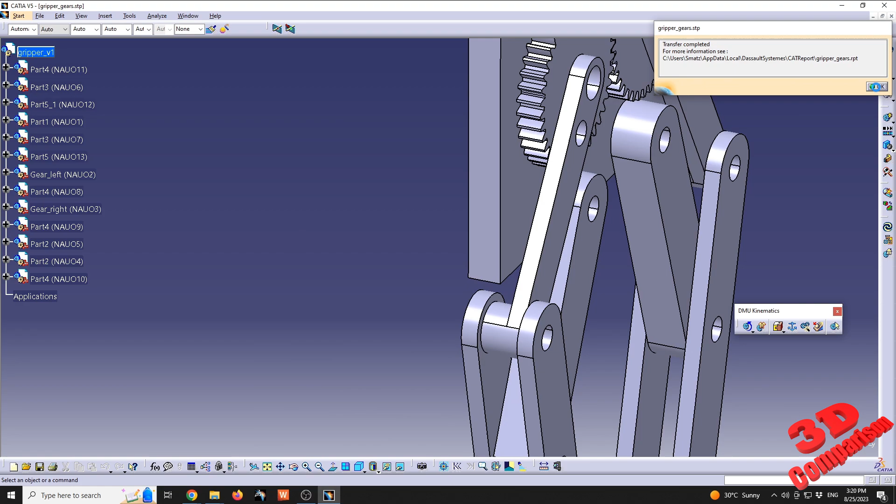I already have that file downloaded, so I will drag it and drop it over here. As we can see, the file loads like this. It's not aligned to the general axis of CATIA, meaning if I go to the cube and select the top view, the orientation will look like this.

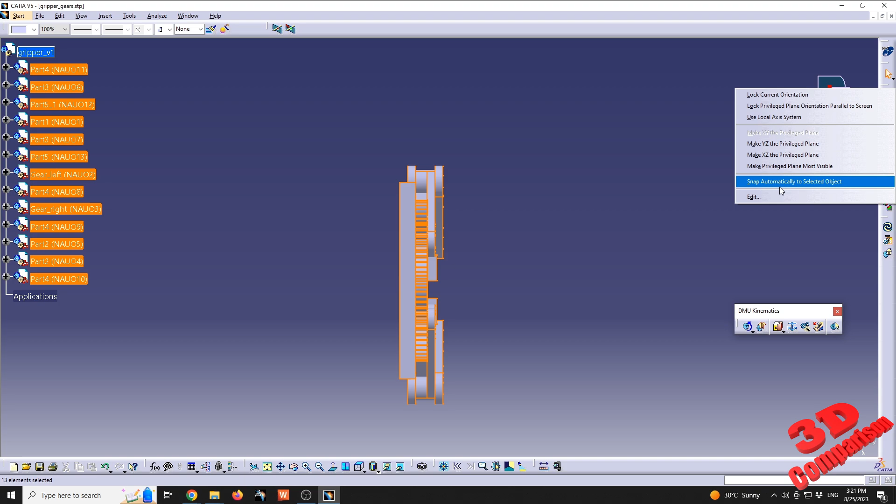In order to calibrate this and have it rotated, we can select everything, go to the red dot on the compass, right click, and go to snap automatically to selected object. Now if we make a selection, the compass will snap automatically.

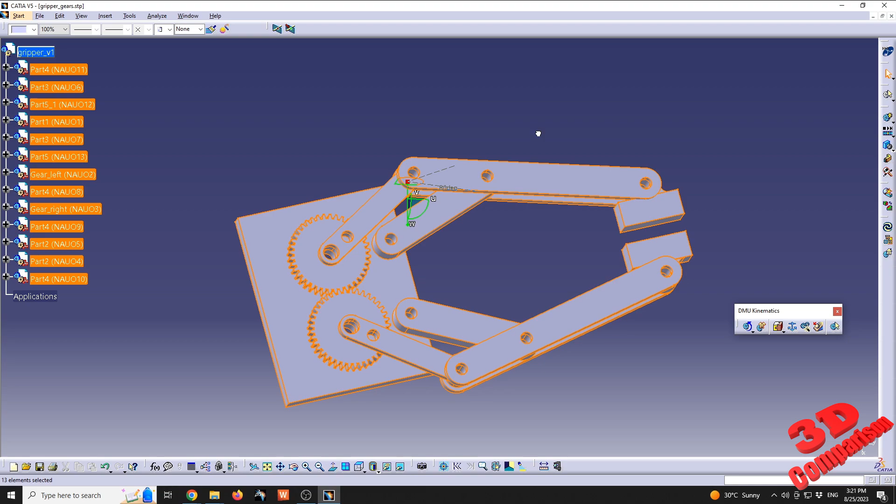We see that the rotation axis will be this one, so I'm going to grab that and rotate it all the way to 90 degrees. Afterwards, I will also rotate it on the U and W axis to have it positioned like this.

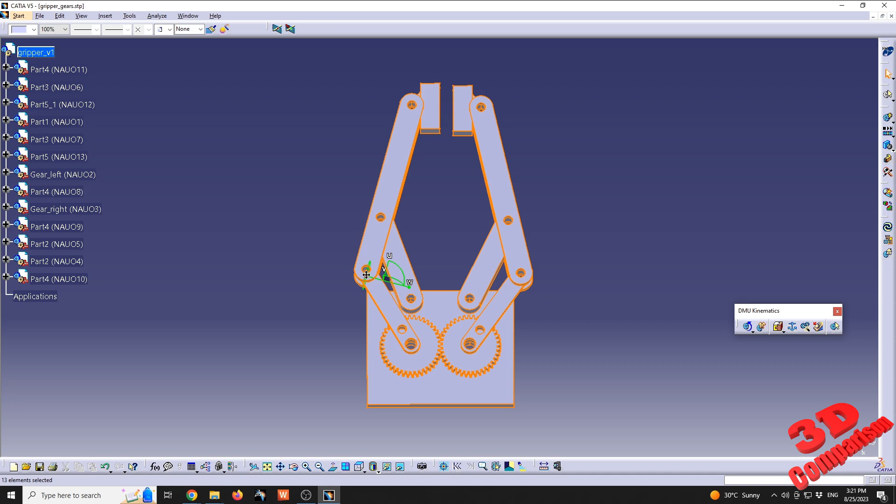As we can see, there are still some elements that are not aligned, so we can enter exact values. I'll right click on the red dot, go to edit, and we have the absolute coordinates here. I will set the angle for X to be 90, 0 for Y, and 180 for Z, and this will be the rotation.

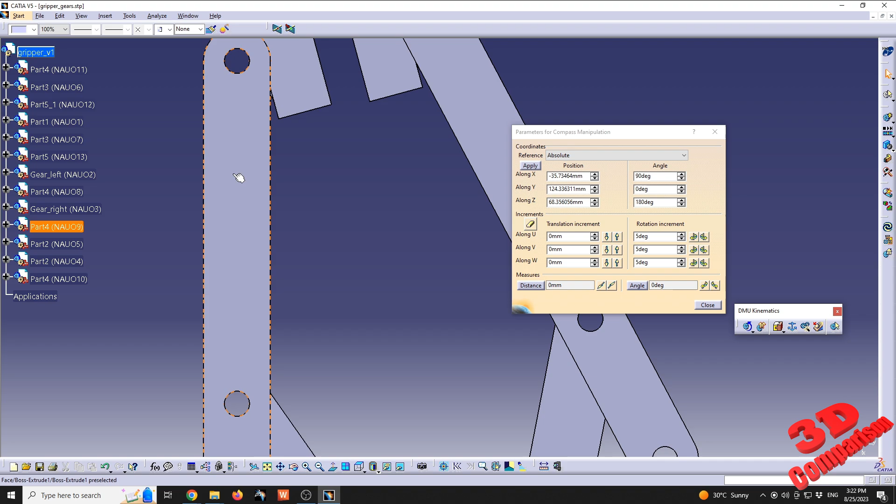Now I can no longer see the depth of the gripper, so this is properly aligned to the camera. But at the same time, the gripper is slightly misaligned.

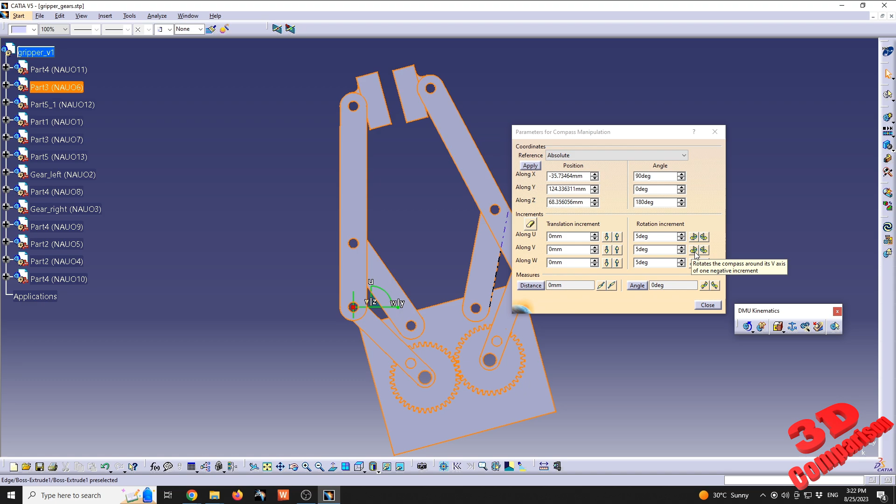We can now use the rotation increments, on the bottom right side of the screen. If I click on this, we'll see that this rotates the compass around its V-axis with this value, in this case 5 degrees.

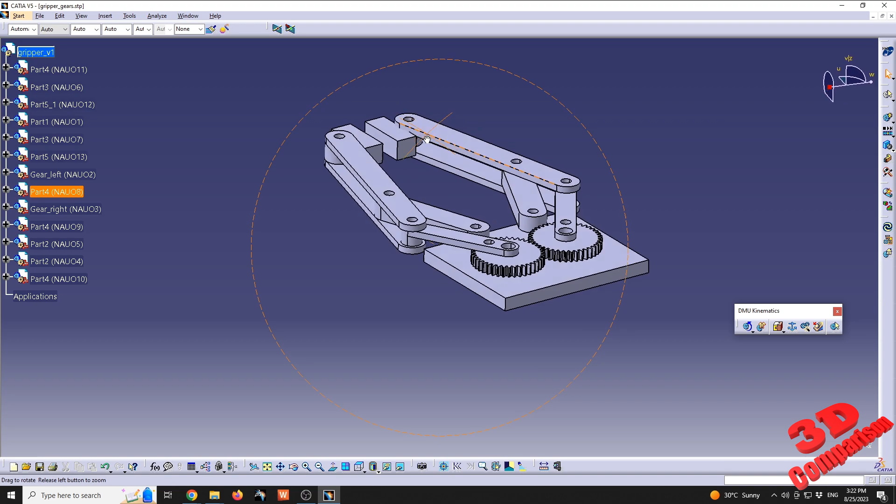So I will slightly rotate this until the gripper is positioned like this. Now, for this gripper, I intentionally made the components not aligned in order to have a good practice example of how we can fix that.

I'm going to jump to Assembly Design because we can align the elements over there. Within DMU Kinematics we are going to simulate them. So go to Start, Mechanical Design, Assembly Design.

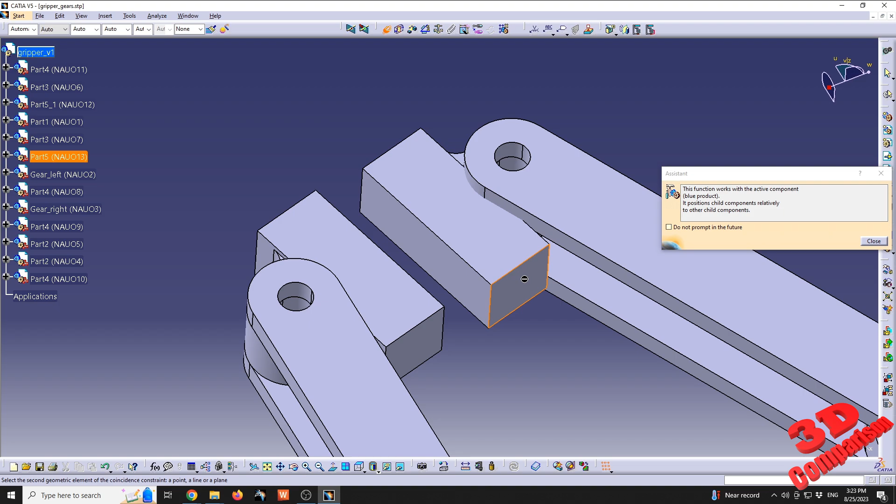I will make these two gripper ends be at the same level, using the coincidence constraint. Afterwards, I'm going to select the bottom surface, so we have this plane aligned with this one.

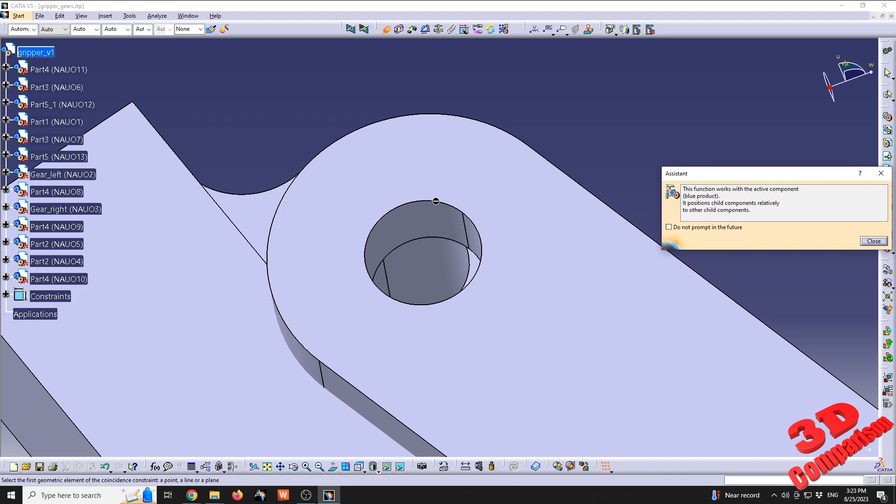We're going to see how this part moves into position to have the same orientation. Click OK, and we see those are now aligned, but the problem is everything else is no longer aligned. So again, using the same constraint, we add a constraint between this section and the other one, starting from the middle and then this one, in order to have that moved.

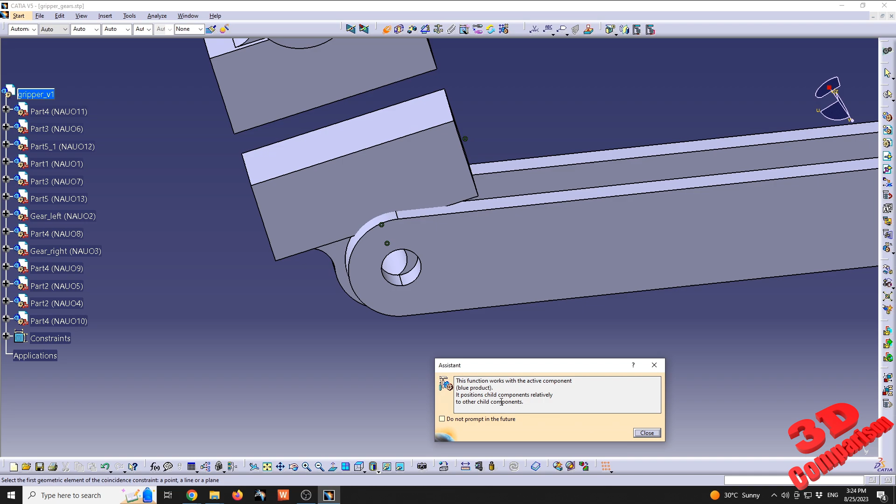Repeat the same command. For me, I'll press Ctrl+Y since this redoes the last function. CATIA Assistant says this function works with the active component; we see the blue product here. I'll add this not to prompt in the future, and we can just start aligning our components.

Again, press Ctrl+Y. This redoes the last command in CATIA, and we just have those positioned.

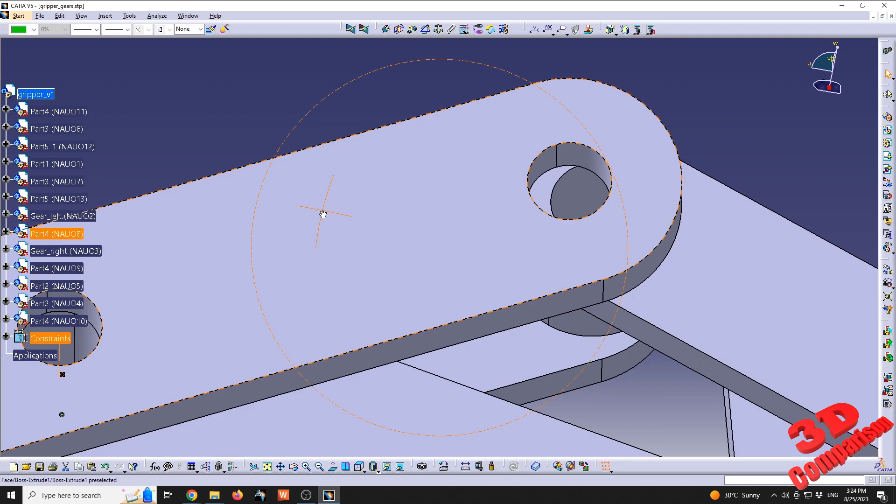Okay, over here the same coincidence. We see that that is considered to be redundant, so we just need to add this one. We see that moved the plate.

So I'll go from the plate to this one. If I go the opposite way, it will still be the same. I will just fix the plate in this case.

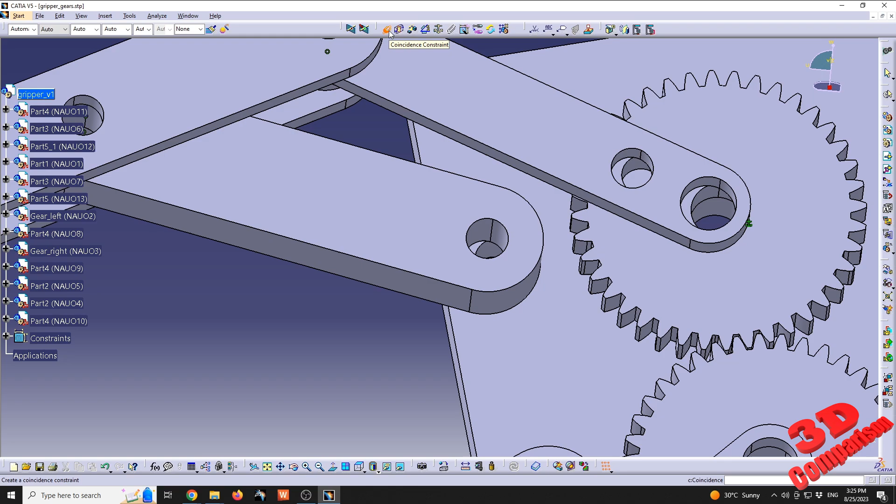So go for the anchor, fix component, and afterwards redo the coincidence. This will move these elements closer to the base. Afterwards we see that these are already centered, so no additional alignment is required.

Now that we have the gripper better aligned, we are going to go and define the mechanism.

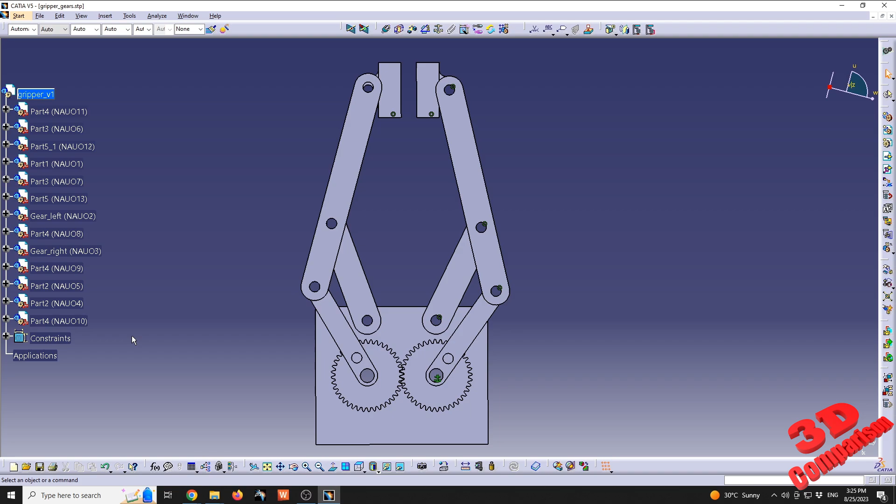We could use the automatic generation that transforms constraints into joints, but in this case CATIA won't be able to do that, and let's see exactly how that works and why it won't be able to.

I will go to Start, Digital Mockup, DMU Kinematics, and we have the possibility to use the assembly constraint conversion, which opens this section, and we need to define a mechanism, so that's the first step.

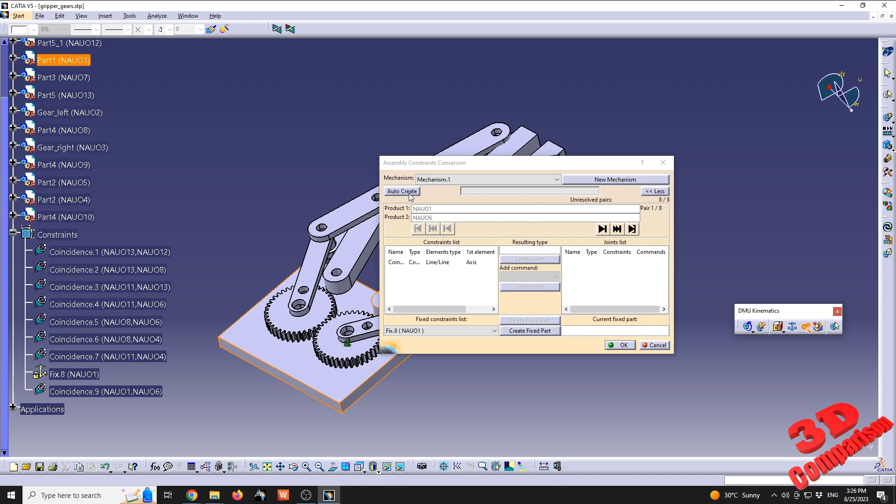New mechanism. I'll let this be Mechanism 1, hit OK, and now we see the constraints here. I will use the Auto Create button. We see that currently, based on the constraints for this side of the gripper, we're going to have a total number of 8 joints.

I'm going to click on auto create, and afterwards, if I expand this mechanism, we're going to see that our mechanism has a degree of freedom of 12, so it cannot be simulated until it reaches 0.

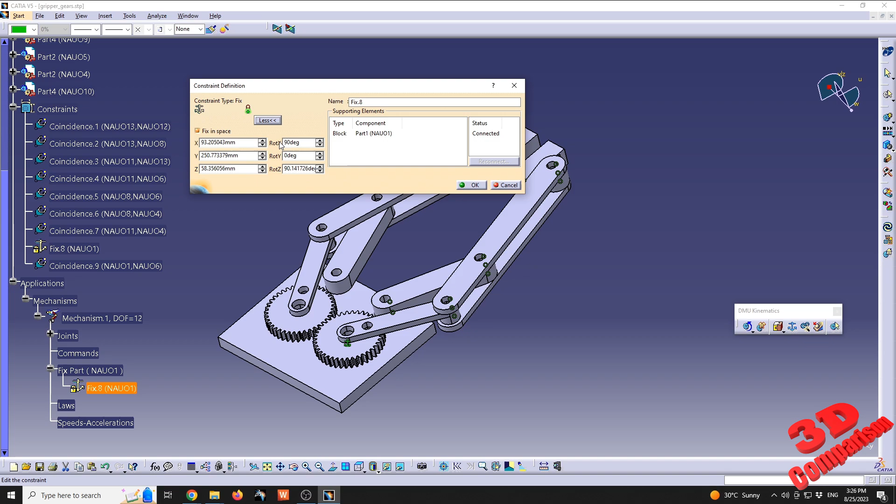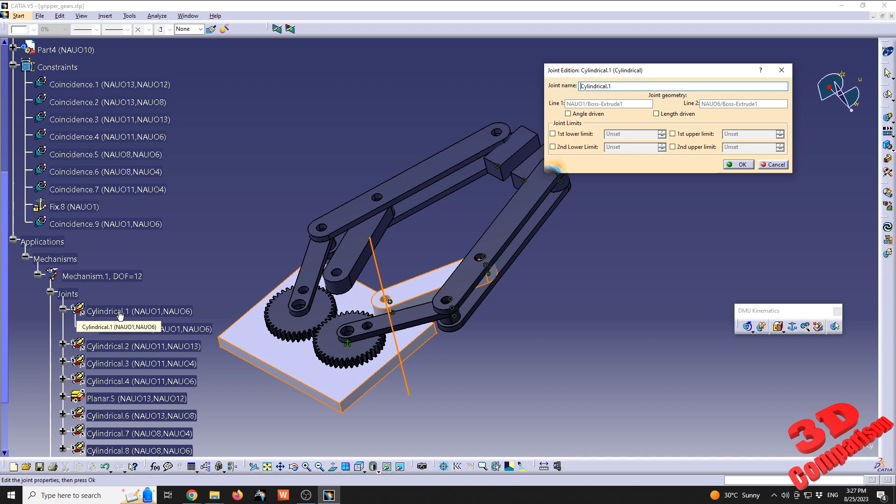The fixed part was managed by CATIA, and we see that we have the fixed component, so that's properly defined. We see the naming, but for the joints, since we made use of cylindric axis, coincidence between those, it considered that it requires some cylindrical joints.

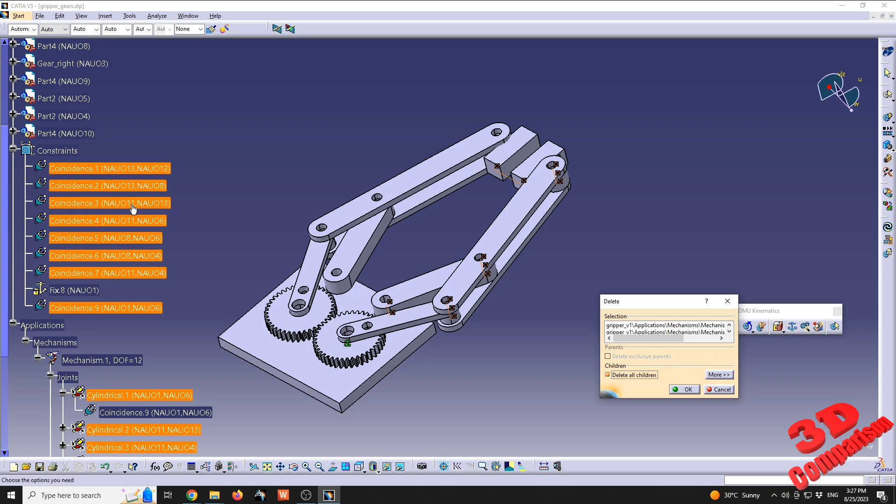I will just delete those because they are not well defined. We're going to see that by deleting those, also the constraints will be deleted. I want to delete all children, since each of those cylindrical joints integrate various constraints.

Have those all deleted, and now we're going to have the fixed part. This is well defined, and we're going to start working our way from the fixed part toward the other side.

So the first joint that we're going to define will be a gear joint. If for some reason you don't find it, you can go to the top, insert new joint, gear joint. We're going to see that the gear joint in CATIA is defined by 2 revolute joints, revolute joint 1 and 2, and we are going to start defining those.

I will click on create. Just like for revolute, we will need to define the axis. The first axis will be for the base, so I'll move my mouse over here where we have the cutout of the base. For the second axis will be over here for the gear. We know this is the base, this is the height of the gear, this is the height of the top component, so I will click here.

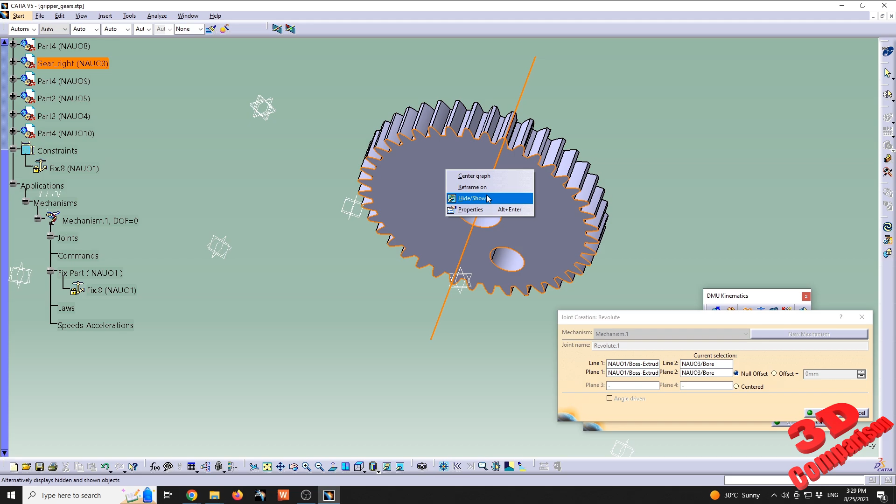Afterwards, I need to specify the plane where that revolute will happen. I will select the top surface of this, and now select the bottom face of the gear. I'll hide and show that, go at the bottom, swap visible space, rotate, select the bottom, send the object back, return to the normal view. Check here with null offset, we're going to see that will be 0, meaning those two don't have any distance between them.

Click OK. We're going to create the second one, the same workflow, so axis with axis, and now the surface where that action will happen. I'll choose the top side of the face, and here the top side of the gear. I'll have this offset, and CATIA will automatically measure the height of the gear, which will be 50 millimeters. So we can do an offset in this case if you don't want to hide and show everything. Afterwards, I'll click OK.

Now we need to specify the ratio. In this case it will be -1, and the rotation will be 1, opposite. Afterwards, we need to define which angle is driven, so either the first revolute, we're going to have the movement from this right gear, or from the left gear if I choose here. I'll go for the first gear we defined, angle driven revolute for this one, hit OK.

We're going to see that now the mechanism can be simulated. That means we can go to simulation, select the mechanism, and have that rotated, and we're going to see that those gears will rotate as intended.

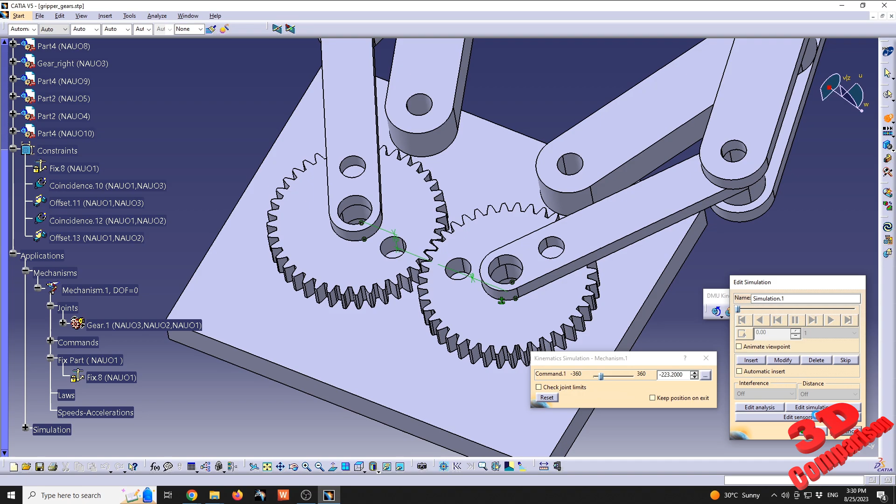Now we can start working our way with revolute joints up to the end of the gripper. That means I'm going to select revolute joint, and select the axis of the gear, the axis of the top component. If you want, we can select exactly that surface where the movement will happen, so we're not going to use the offset, but it's up to you. If you want, you can use the offset, it will be faster, as we can see.

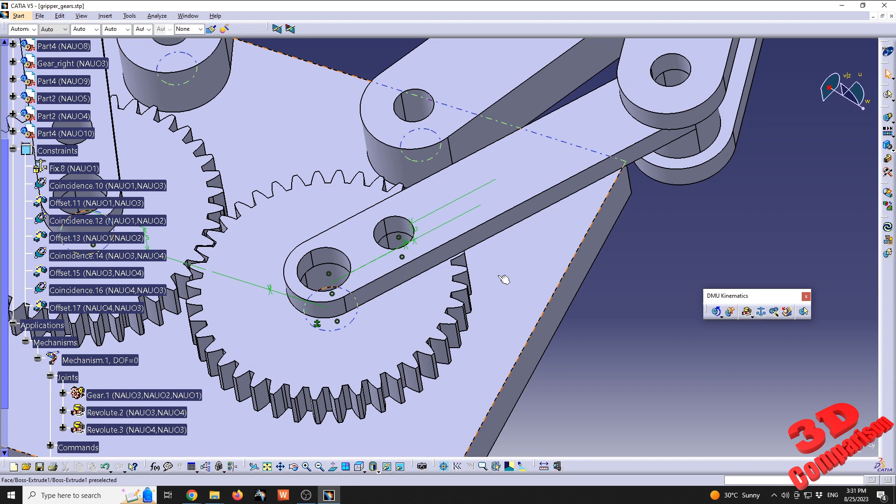Now, as soon as I link this gear and the top element twice, we see that the mechanism can be simulated again. When we only had the first revolute generated, we had a degree of freedom here. Just as a reference, I'll delete this. We're going to see degree of freedom 1, meaning we cannot simulate the mechanism, so we won't have that slider until we fix that degree of freedom.

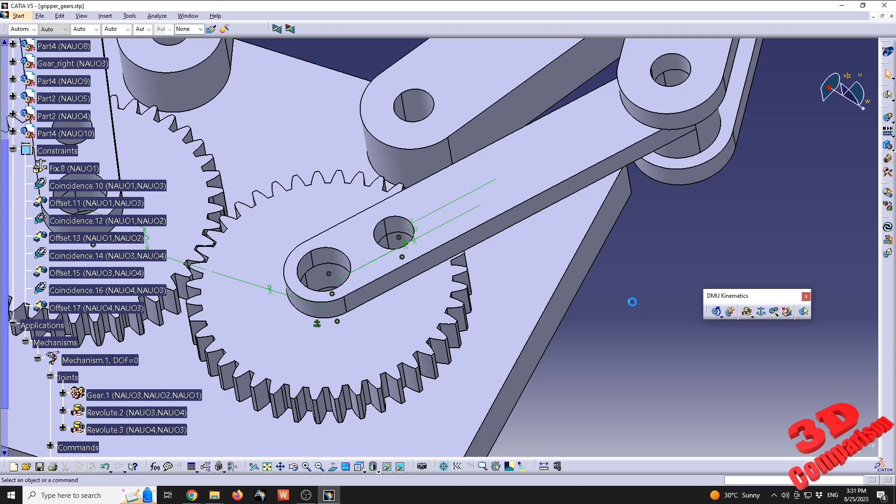To fix that degree of freedom, we just need that revolute created. So I press the redo button to have that recreated, and we're going to continue with the same workflow.

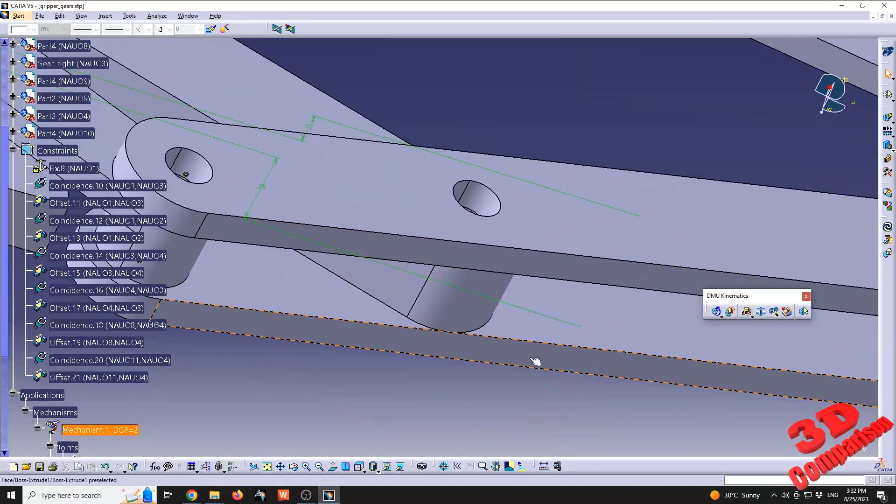So axis for another revolute between the top component and the middle one. I'm going to rotate to the bottom, do the same here as well. I'll just go with the offset, but I encourage you to go with hide and show, especially if you're just learning. It's better to select exactly that null offset, for example, like this.

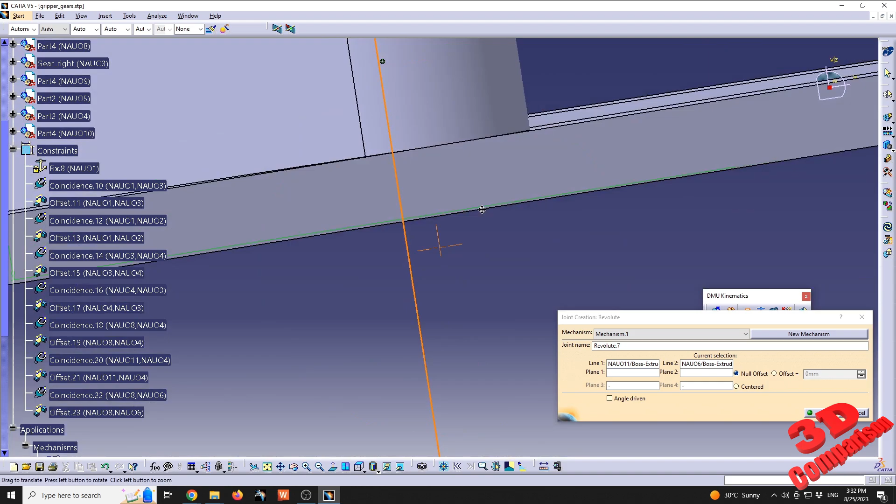It's best practice to not use offsets for your simulations, only when it's faster. But it's usually a good idea to have those defined exactly where they will happen. So we had that defined. Let me redo the last one.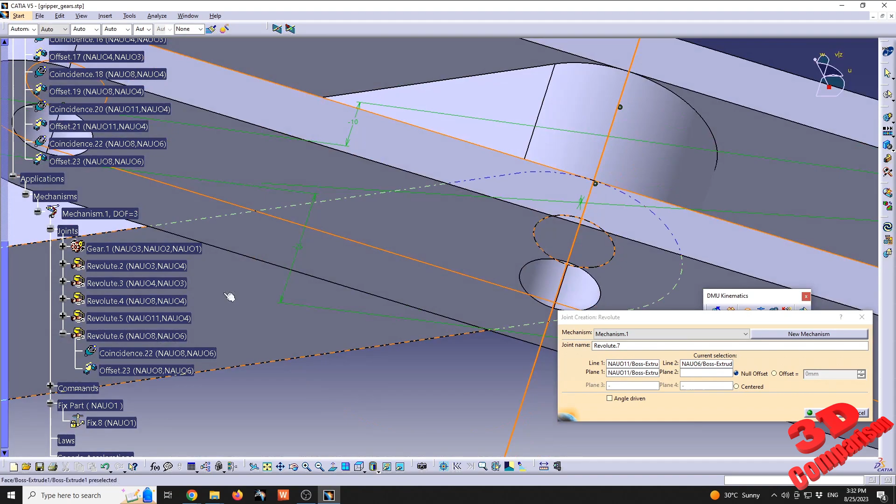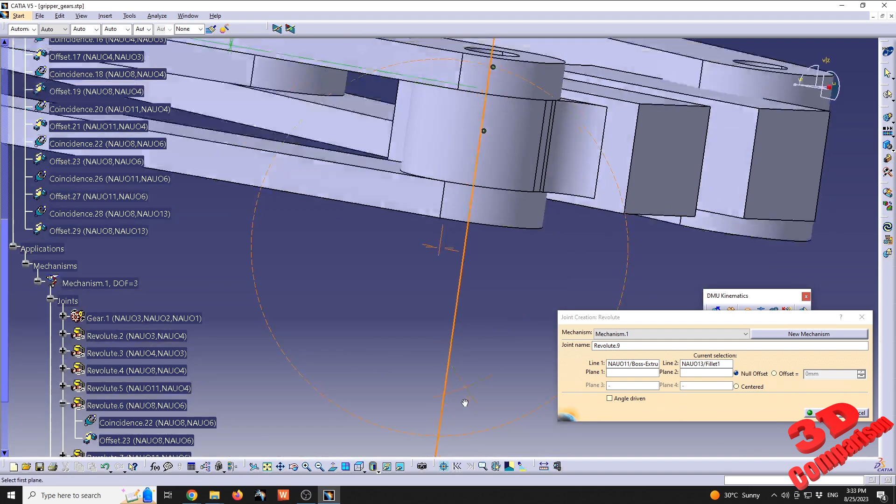So with this one, the area where that will happen will be this one. As you can see, it went okay, so we didn't have any error. The following one for the end will be that surface with null offset. The same at the bottom, revolute axis, surface. And we see that we still have a degree of freedom of 3 that can be fixed by simply making the end of the gripper rigid to this component, or the bottom one.

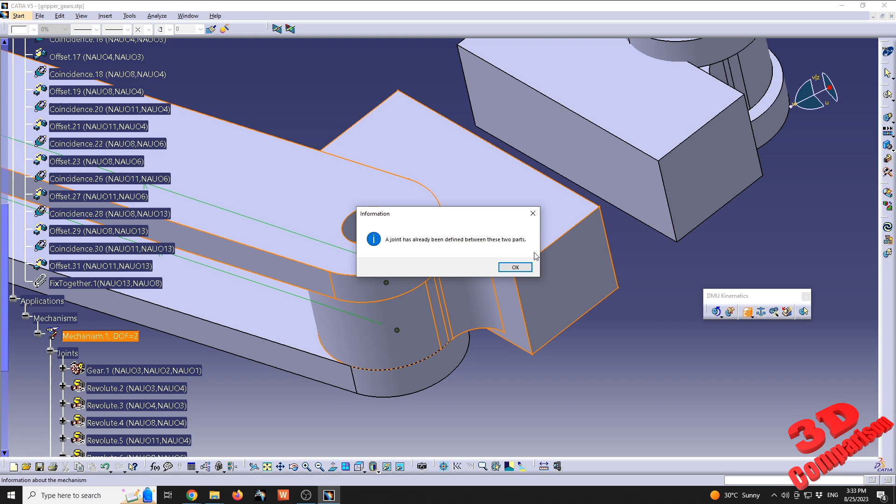So I'm gonna go over here for rigid joint, select the element, select the one that we already linked, and now we're gonna see that we receive this message that a joint has already been defined between those two elements. That means we already have that revolute added between those two, and it won't allow us to make it rigid towards that.

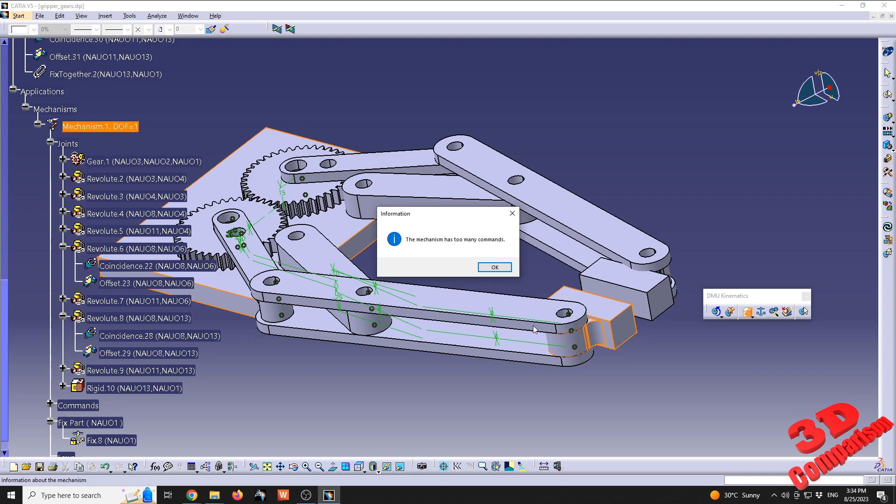Therefore, we can make it rigid, for example, to the base. You're gonna see that now this will have too many commands, so that is not an option as well. So let me just see how many revolutes do we have.

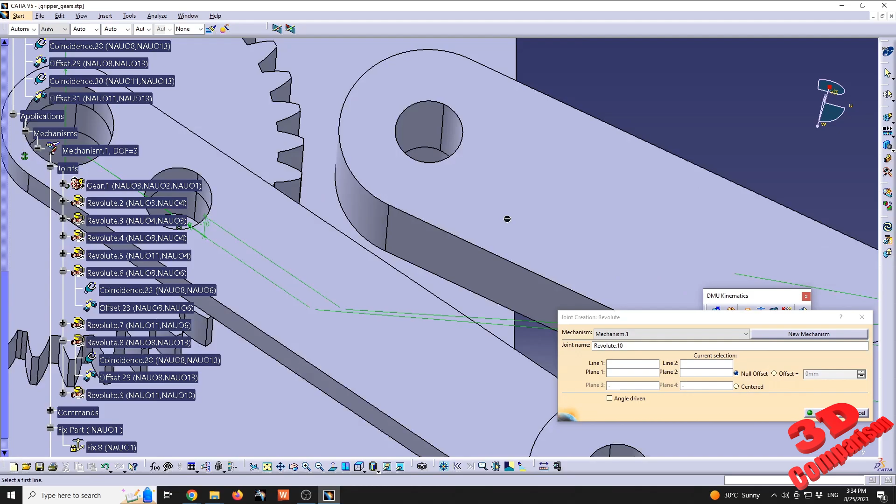We still have to link this, and we're gonna go back to that in a second. Select that with that, afterwards the offset. We see that now the degree of freedom went all the way to 1. So it's only this component that is not fully defined.

And for this, usually a rigid should do the trick. That means this part should be rigid to that one. And we see that now the mechanism can be simulated. So keep that in mind.

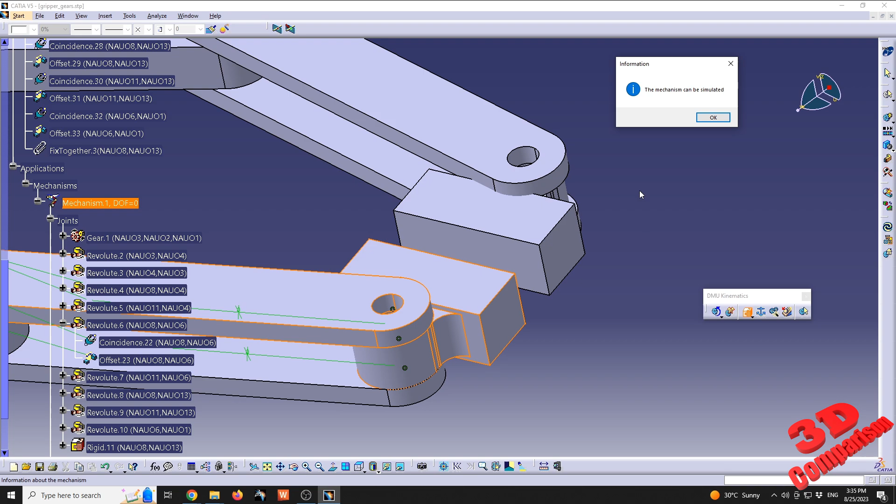Before, when I tried to do the same, I received that error that there is already a joint between those. So that was, let's say, maybe the order of the joints is really important in CATIA. As we can see, we could have that defined as a rigid body and it worked, but we had to initially add that over there.

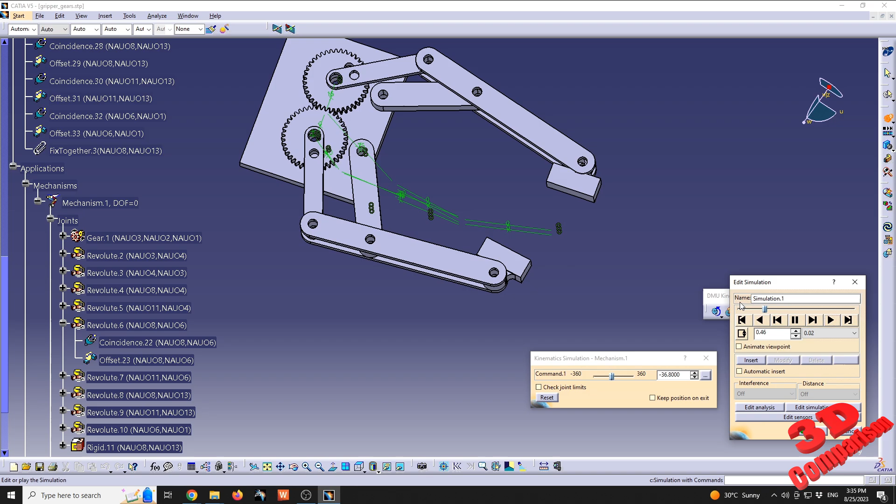Now we're gonna see how this will simulate. So I'm gonna rotate this minus 80 and we're gonna see how this will open, and we have the possibility to check the simulation over here with the edit simulation. So this works, let's say, as intended.

We stopped at minus 80, so we won't have a collision over here because the design of this gripper is not that great. And if we won't be careful with that, we can clog it over there.

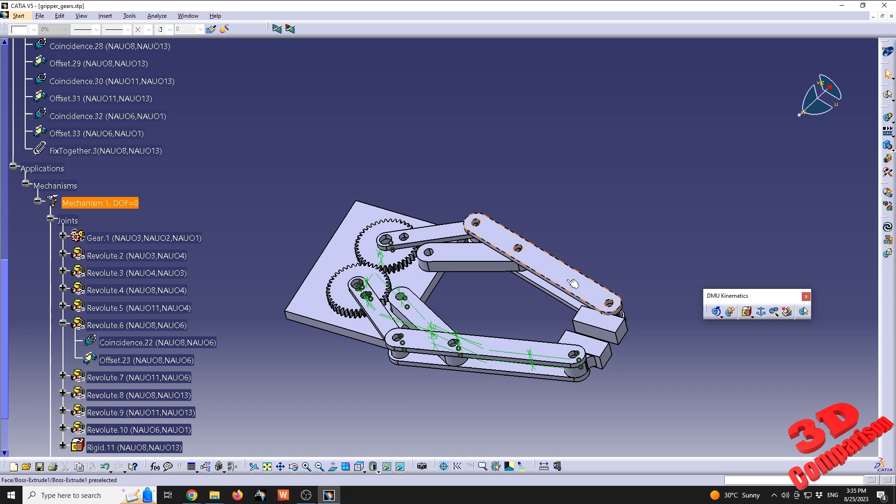Okay, hit cancel for the simulation, and the same workflow will be for the left side as well. So we're gonna use a lot of revolutes between these two. I'm gonna use the offset, so it will be a little bit faster.

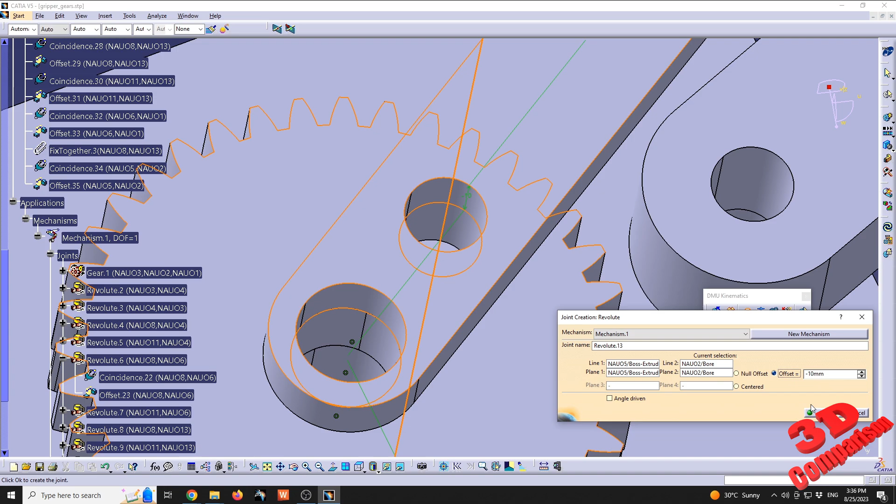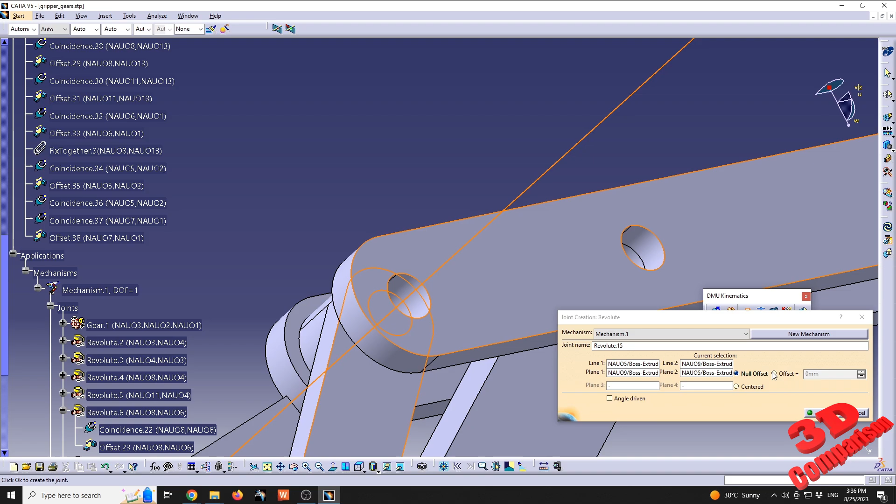But again, I encourage you to rotate around the model, do the exact areas where we're gonna have that null offset, because that's, let's say, the correct solution to this, not to cheat with offsets. But it's not that bad if you do it. It will be faster and you can simulate it, if that's the main intent of this.

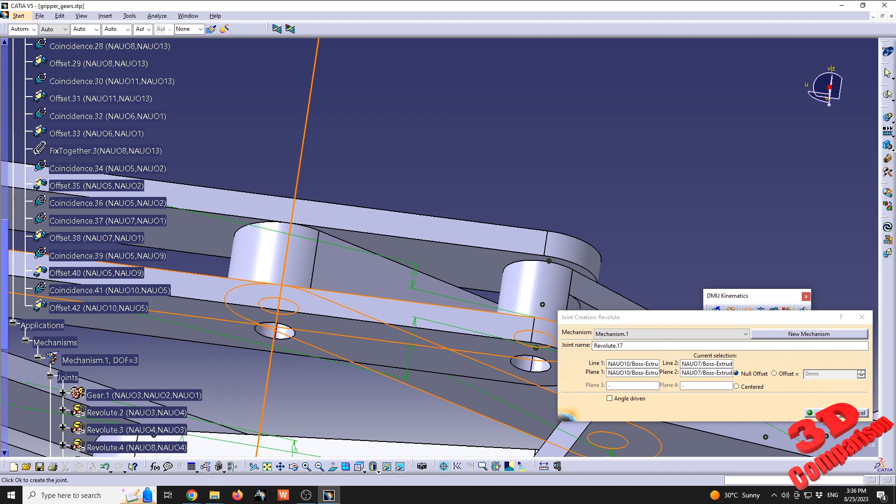So those two axes, and I know that this will be the null value for that, where those two planes will be on the same plane, those two surfaces.

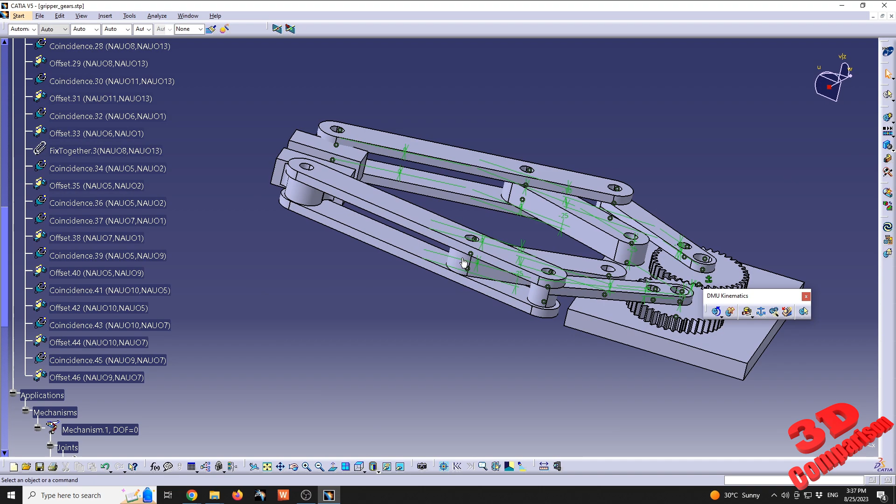Okay, we see that this one is also okay. Now we can simulate that, but only with this. We still need to connect the following component in order to see everything simulated.

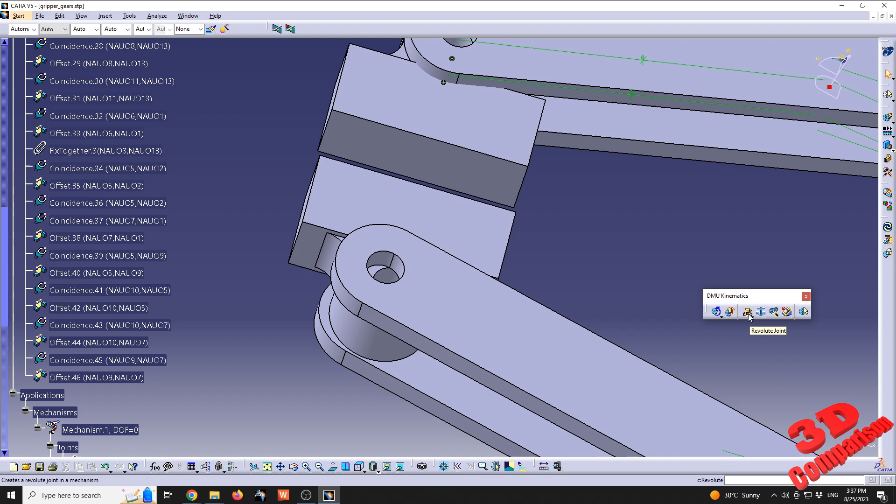And now we see that over here we have a slight misalignment since we moved that initial gripper position. That will just fix itself by finishing the revolute, so don't worry about that. We're gonna have this revolute between that and that. We're gonna select the surface, which will be this.

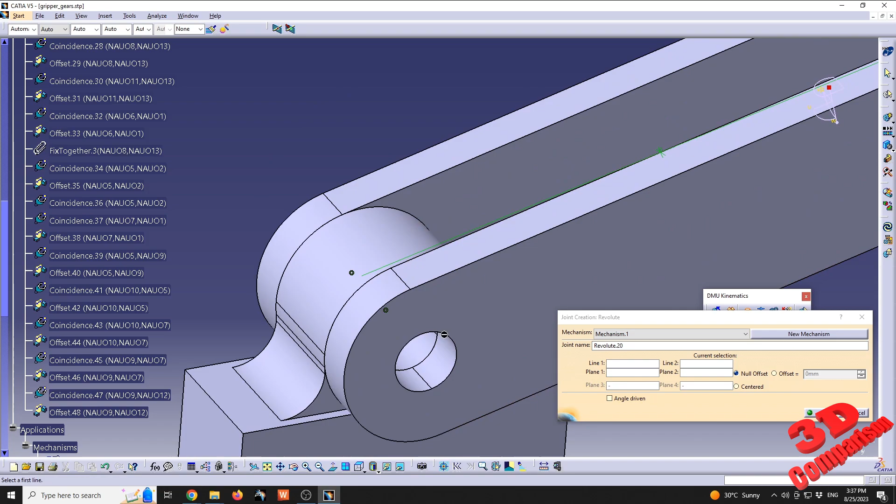Okay, and we saw how that snapped back into position. This is also the reason why the gripper that I use for this case study is not perfectly aligned, in order to show how you can also move those.

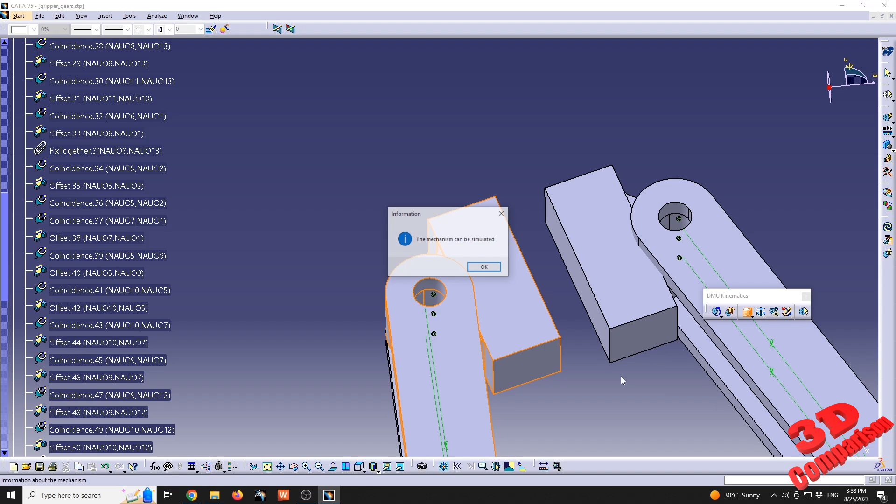And now we can just go with rigid body and again have that linked. Now we can do the simulation by going to the simulation panel, mechanism.

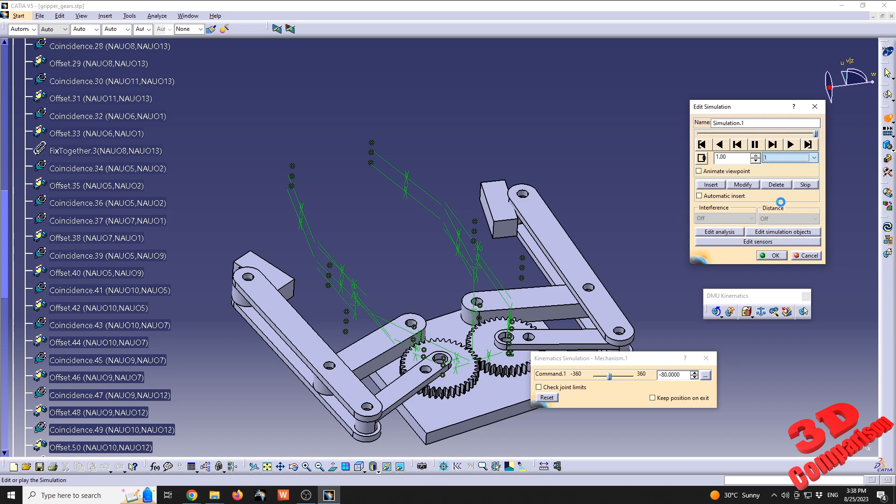I will choose the value to be minus 80 in this case, hit enter. We're gonna see that the gripper will be opened. Click on insert, and afterwards we can have this simulated by going in a loop, back and forth. I'm gonna click on play forward and we're gonna see how that gripper will close.

If you want, we can go a little bit forward with it, so not only minus 80, we can go something like 5 degrees positive and so on.